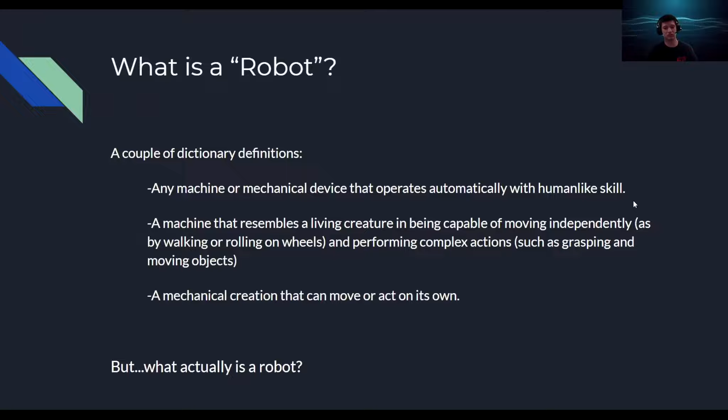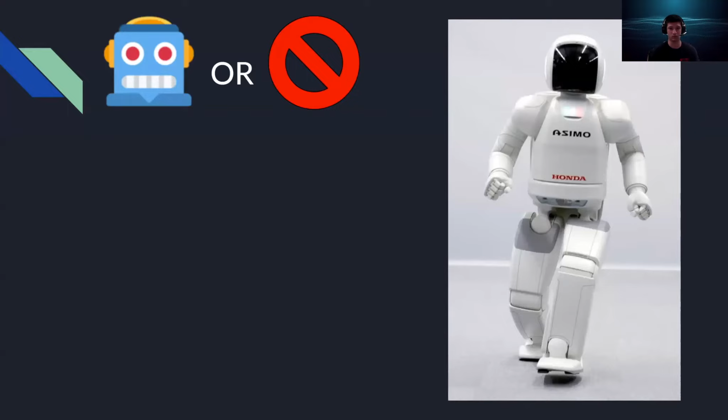So we're going to start off with a little game that I like to call Robot or Not. Here's our first example here. This is something that is built by Honda. It's called the Asimo, based off Isaac Asimov, who's one of the founding minds behind the principle of robotics. But who thinks that this is a robot?

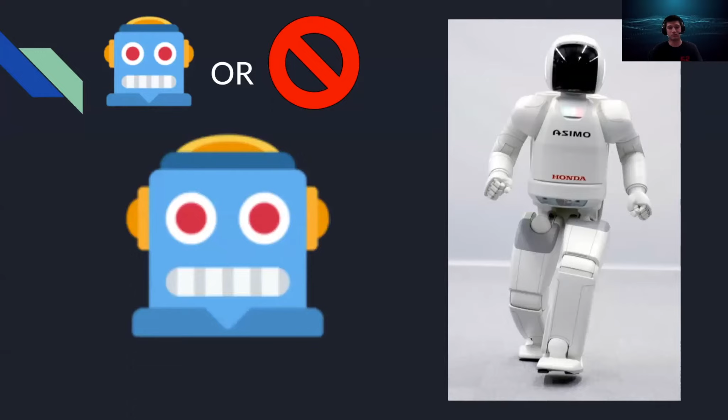This is in fact a robot. This is a pretty clear example of a robot. It looks like you'd see robots in movies. It functions autonomously. It can walk around. It can make independent decisions. It steers itself. It responds to environmental features. It can talk to people. This is a pretty cut and dry example of a robot.

And if you look at the two criteria for being a robot, it moves clearly because it's a car. But the more interesting thing to think about is that it performs functions on its own without control. That's not to say a robot can't be controlled by humans, and many robots are, but a car does a lot of things autonomously. That means without human control that you don't really think about. For instance, how fast to rev the engine, how much fuel to mix with oxygen, how fast to spin the fans in the air conditioning.

Some cars even have more advanced features like automatic corrective steering, GPS navigation, blind spot monitoring. Those are all things that the car does on its own because somebody programmed it to do that, somebody built it to do that, somebody set it up so that it does that. And it does it on its own without you needing to tell it, hey, do this for me, do that for me. So that's another example of a robot that you might not think looks like a robot you see in movies, doesn't look like the Asimo, but it is in fact a robot.

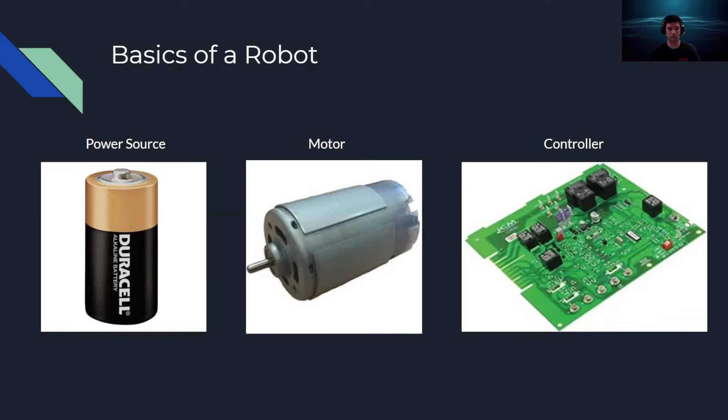That's how you can do things like spin the wheels on a car or vibrate your phone, or operate a robotic arm. And finally, the control circuitry is most analogous to your brain. It tells the robot what to do, when to do it, and how to do it. That's where decisions are made in the robot. Those decisions are often made both by hardware through different components on the circuit, or by software through code and logic. So that's an overview of the three components, but let's take a look at them more specifically.

The first type here is the DC motor. This is a powerful motor, more powerful than some of the other things. It's often used for things that require a lot of force because it can provide that power. Whereas something like a servo motor is less for power and more for precision, because you can control it much more accurately than a DC motor. Servos have a limitation that most of them can only rotate 180 degrees, whereas a DC motor can spin forever.

Servo motors hit a limit once they get to 180 degrees, and then they have to go back. But sometimes that can be an advantage if you only want a motor to be able to turn that far, or if you want to have the precision of being able to go back and forth, because a DC motor doesn't have as much precision and it's harder to get it to go back and forth as precisely.

Another type of motor here is the stepper motor. That's a very complex type of motor. Rather than just power like a DC motor, it takes in a kind of interesting waveform signal, which means the signal has information in it, and that information gives it very precise control. The reason why is because it's in the name. It's a stepper motor because it makes little steps towards the direction it wants, rather than something like a DC motor, which is just continuously rotating. That gives you a lot of precision, but what you trade off for the precision is it's a little less powerful, and it's slower compared to some of the other motors.

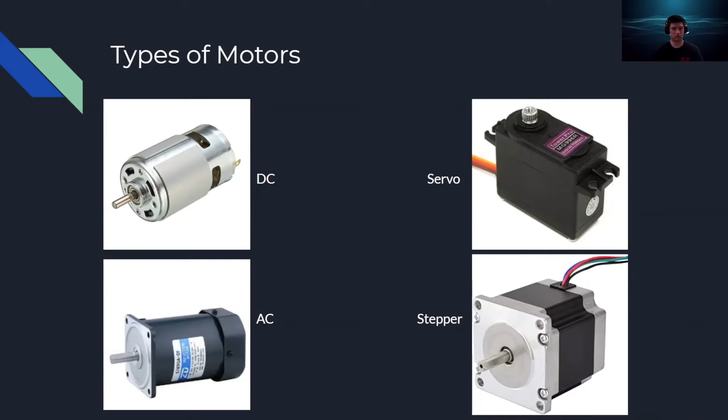Electromagnets are very cool and have all sorts of different applications. What they're used for here is the little red coils with arrows on them - those are the electromagnets, and they have a coil of wire. When you run electricity through a coil of wire, something very interesting happens, and it makes a temporary magnet.

These north and south here are permanent magnets, kind of like you'd have on your fridge. The little slivers hanging off show what polarity the magnet has. If that's the positive, or north, it'll be in red, and if it's south, it'll be in blue.

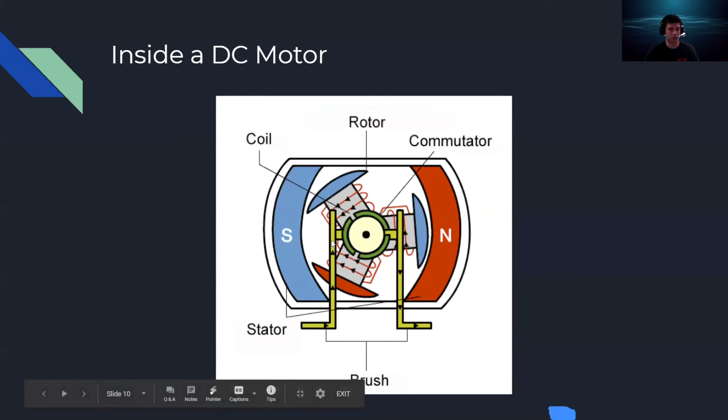If you put a north next to a north, it's going to repel. So you can see, as it comes over here, it puts a north next to the north. That's because the direction of current, which is the flow of electrons, represented by this arrow, is making the electromagnet in such a way that it pushes off of this north part here and gets attracted to the south part over here.

Once it reaches the south part, it changes back to south, and it suddenly repels from the south part over here and attracts to the north over there. That continuous pattern is what makes this spinning motion of a motor that you see.

There are much more complicated kinds of motors - some use hundreds of electromagnets, and there are motors that use very different designs. But this kind of gives you an idea of how a motor really works and how you turn electricity into mechanical motion.

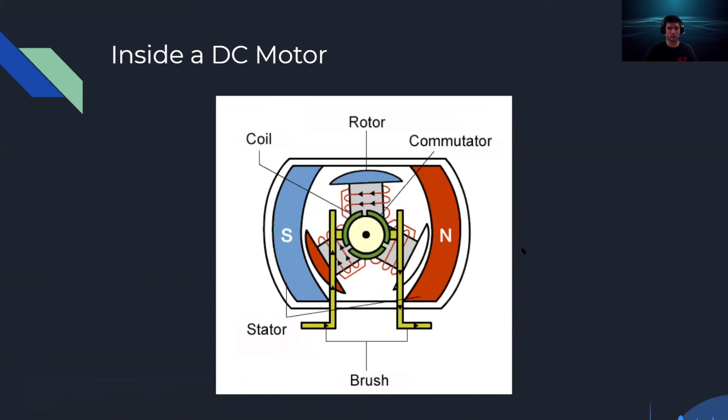It's great to know where the motor is, but as you see in this diagram, there's this power that comes in from somewhere and goes out to somewhere. But where does that power come from? To figure that out, we have to look at power sources.

Every robot has a power source. Power sources can be lots of different things - it could be a battery, a generator, a solar panel. The engine of a car is a power source. A turbine, a water wheel, or any number of things really can be a power source.

Power sources work by creating something called a potential difference, where the electric potential at one end is different than at the other end. That potential difference causes something called a current - a flow of electrons. Electrons are what carry charge in an electrical circuit, bringing power from one area of the circuit to another area of the robot. So this potential difference creates a current through the robot.

Can I hear? Do you have a question? Do robots necessarily need a control?

Yes, and that's not to say that everything that's mechanical with an electrical circuit needs control, but to be a robot - remember we talked earlier about the two conditions of being a robot - it has to move and it has to be able to make independent decisions. That's where the second part comes in. The control circuitry is where those decisions are made. The control can be very basic, or it can be really advanced in the case of some robots, but it always needs to be there in order for it to qualify as a robot.

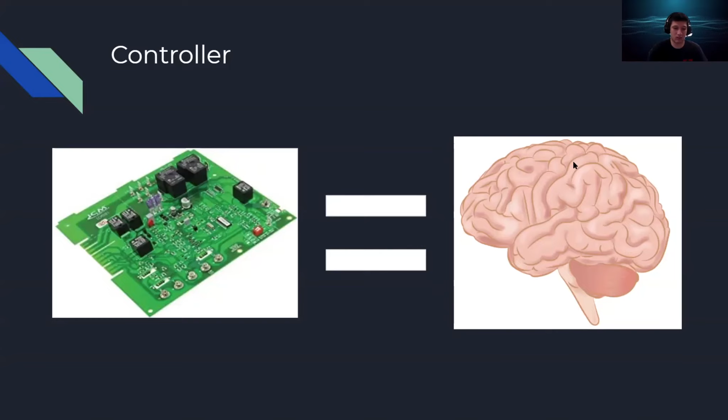So we've talked a lot about the different parts of a robot. Let's talk now about making a robot. But first, if there's any questions that you have that I haven't answered yet, feel free to ask them now.

Isn't potential energy about how much energy it can have? I heard that that's what's mainly calculated in equations. I think the total amount that I can have—I don't remember exactly how this was described, but it was a ball at the top of a hill. It has that much potential energy, but it doesn't have the energy. I think that's what I meant.

Yeah, so it's very similar. The ball at the top of the hill has something called gravitational potential energy. So what that means is that if the ball were to fall down the hill, it would have kinetic energy, which is the energy of motion, because it would be falling down the hill. But at the top of the hill, it's not moving, so it doesn't have that energy. But because it's at the top of the hill, it could have that energy, and that's what potential energy is—it's basically saying it could have that energy because of something like its position at the top of the hill, or its position in a certain environment.

Electric potential energy works the same way, except instead of a hill, it's kind of an imaginary hill, where the electron is at the top of the hill and it wants to go to the bottom of the hill. In doing so, it has to fall down the hill. But while it's at the top of the hill, it's not falling down the hill, so it doesn't have the electric energy yet—it still only has electric potential energy.

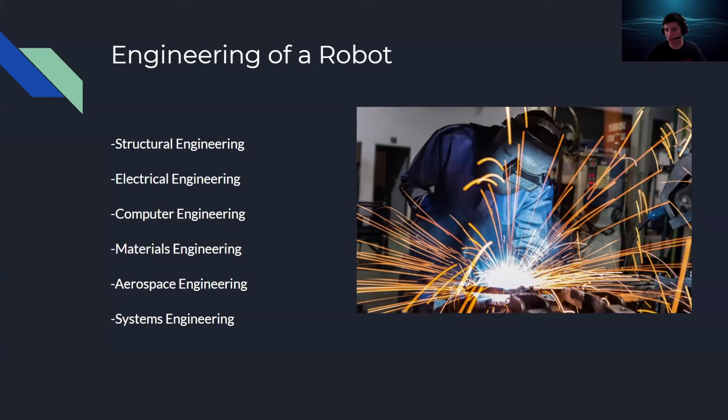So we're going to move on to the next topic. Here's a little bit more of a mathy topic. I hope you have your math hats on, because we're going to talk about a few principles of engineering.

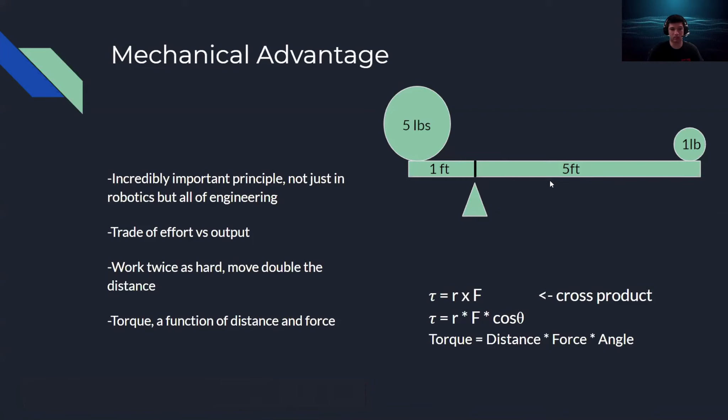So now we're going to talk about gear ratios. Gear ratios are another form of mechanical advantage, and gears are hugely important for a lot of robots, for two reasons.

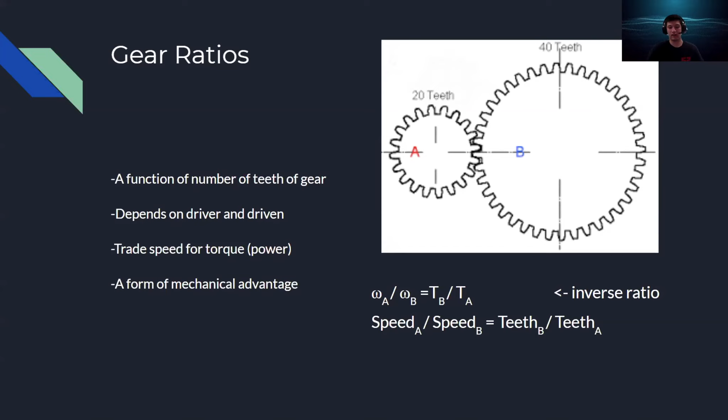So let's say there's something really heavy and you absolutely need to pull it. Gear A might not be able to pull it. Gear B could pull it, but it might take twice as long. Depending on the scenario and your usage, that might be what you want, or you might want it to go twice as fast, and so you'd pull it on gear A.

Yes, that's binary. Binary comes from the Latin 'bi', meaning two, because there are two things, right? It could be a 0 or a 1.

With programming, you are able to turn your words and your variables and your functions and all these things into ones and zeros for the robot. Those ones and zeros go to the control circuitry, and it tells the control circuitry exactly where to send power, when to send power, what signals to take in, what signals to send out, and to perform all the functions you want your robot to do.

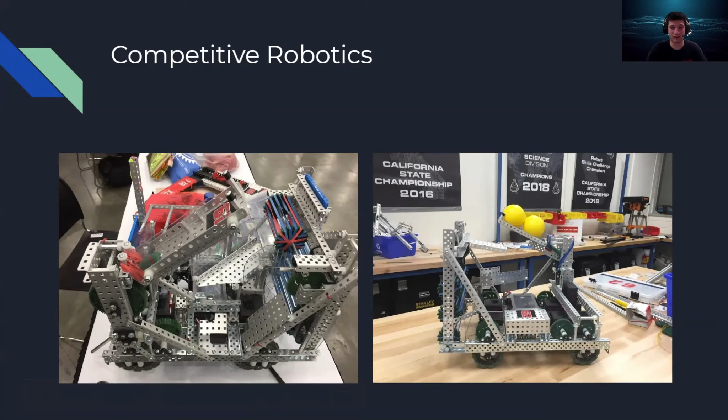This is a TV show, so it's kind of sensationalist and based on emotional response more than engineering, but there are some very high level engineering decisions made with these BattleBots. I've never worked on one personally, but I'm friends with a few people who have, and the amount of engineering, building, constructing, programming, designing, and teamwork that goes into these robots is insanely complicated. If you're interested in engineering, I'd recommend watching the show. Even if you're not, I'd recommend it because it's a great show.

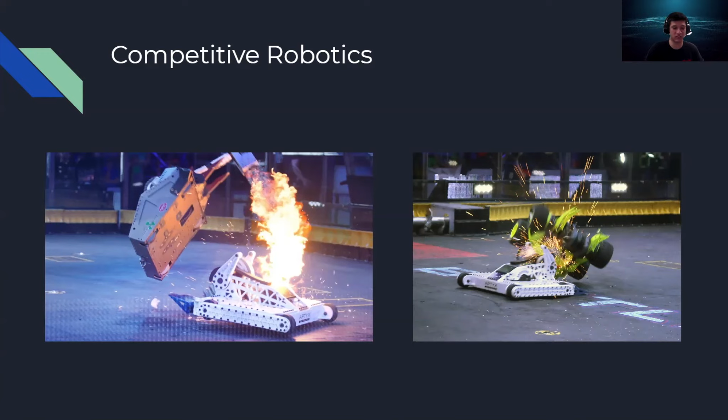But it shows off different engineering strategies and building, and how to make a robot do what you want it to do. So this is kind of one example of some very high level robots.

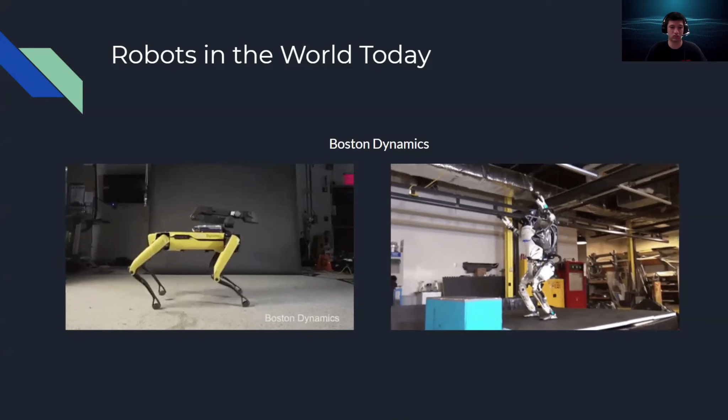Another one you might have seen is from an organization called Boston Dynamics. Boston Dynamics makes really incredibly cool robots. You can see this one on the right doing backflips and jumping up and down, and that's a full human-sized robot with no wires connecting it to anything else. It's all been built and programmed by someone using these processes to do exactly that. At the very core, it's all motors, power sources, and control circuitry, and all of these robots have that.

Why don't they use robots in wars? They do use robots in wars. Boston Dynamics has actually worked with the military to develop robots that carry supplies. Even a really basic example - think of it this way - planes, tanks, and ships are all robots. So to get back to what we were talking about earlier, and some of you brought up, was the possibility of robots harming people. I guess war is an example of that.